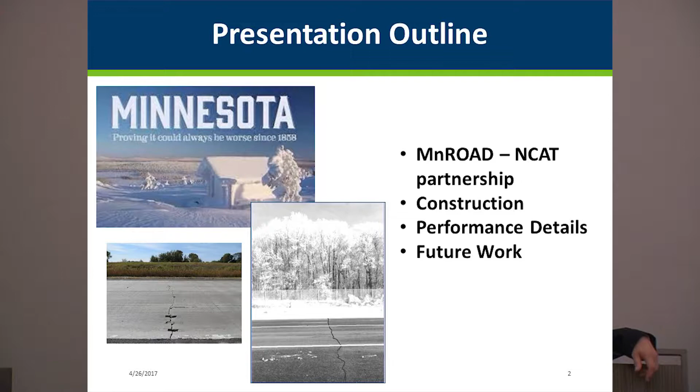I'll talk a little bit about the partnership and how it was developed and why it was developed. I'll talk about the construction that's taken place, and talk about some of the performance of the studies we're doing. I'll touch upon both the pavement preservation side, which is the main focus, but also the HMA performance tests we're doing for cracking. And I'll talk about future work that's coming up as we go forward.

This partnership was one of these things where, if you know Buzz Powell, I think everyone knows Buzz from NCAT. Buzz and I have been friends for a long time through the accelerated pavement testing groups, and we've always said, wouldn't it be nice if we could work closer together? So we finally got our chance when NCAT showed up in June of 2014 and said, let's partner. That was great, no one really expected them to come up. It was kind of a surprise, but we've been able to develop a partnership and work with our two different test facilities.

We have our test facility in Minnesota, and they have their test facility down in Alabama. The idea is that they have a hot, wet, no-freeze climate, and we have a cold freeze climate. If things work in both areas, they would work probably anywhere else in the United States. So we work off the strengths of each other. NCAT's got a great facility, great people, and so do we in Minnesota.

We talk about operational work, doing things more similarly, data sharing, and the analysis side. But it also gives us a greater national appeal, because you can't just build these type of test facilities any day. I think Minnesota built ours for about $25 million in 1990. Now, if you had to build one, it'd be $80-some million. So it's really tough to build a facility like MnROAD, but to utilize it and share it makes a lot of sense for us nationally.

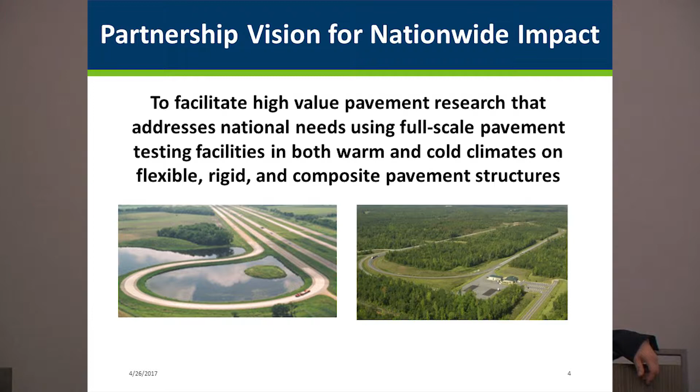So we're trying to facilitate high-value research that our customers are really looking for and need. There's lots of other fancy words in there too, but again, it's about getting products out and getting them utilized and implemented.

I talked about the two different studies that we're looking at, or have started. I'll touch upon the development of the national cracking performance test, but I'll focus on the national pavement preservation study we're doing. This shows the two pictures of the two facilities. How many people here are familiar with NCAT and MnROAD? I get audience participation there, thank you.

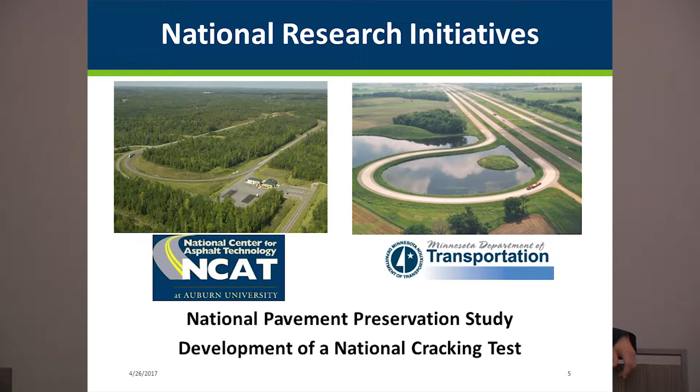For those who don't know, NCAT is a 1.7 mile oval test track. They have 5-axle semi-tractor trailers, with 5 following each other around providing lots of loads in a 2.5-year cycle. So they go on 3-year cycles, but with 2.5 years of loading. MnROAD has both a low volume road, which you can see in the picture, and also a mainline interstate test section. Alongside there's 3 lanes, that's I-94 northwest of Minneapolis, Minnesota. In those areas we're able to do different research for concrete and asphalt. The National Center for Asphalt Technology is, as you'd guess, focused on asphalt technology down in Auburn.

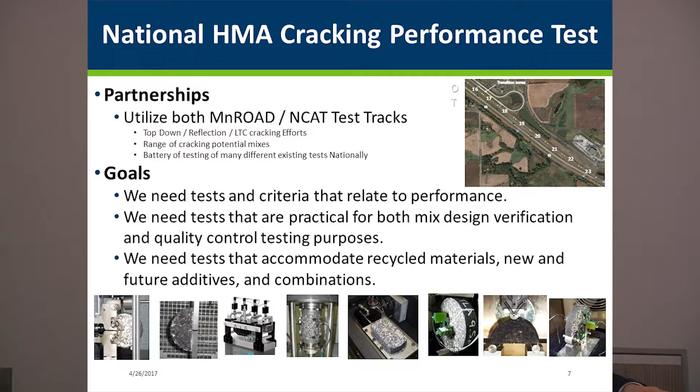We're trying to look at that in the mix verification and mix design form, but we need a test, because if we don't have this test, there's new products always coming out, like recycled materials and different types of polymers being added, and different combinations thereof. How can you test those products or stay ahead of the curve unless you have a performance test to see how that works? What effect does that have on your performance?

What NCAT did a couple years ago, they've been putting traffic on these test sections for almost 2 years now. They have 7 test sections, 200-foot sections, with instrumentation in each one, looking at top-down cracking.

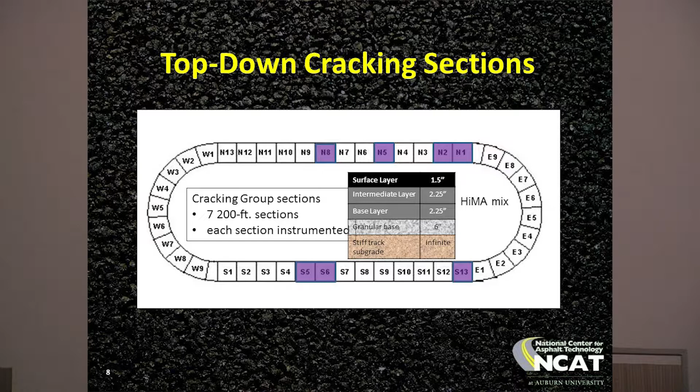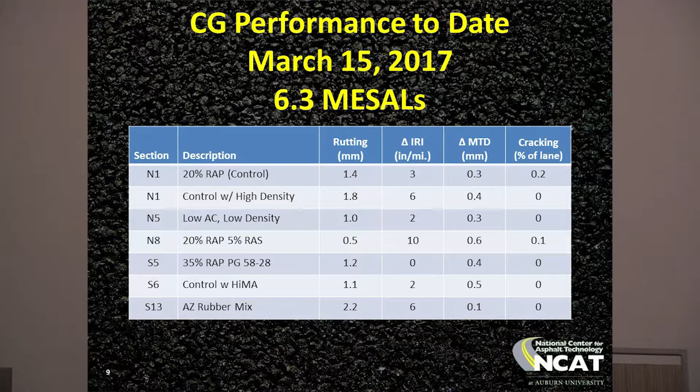Right now those 7 sections, you can kind of see the different mixes they placed. Some of those mixes you'd think would have more top-down cracking than others, but right now the performance is relatively good for all of them. The rutting, the difference in ride, the mean texture depth are all pretty good right now, and there's not much cracking, but they still have probably about 10 months of loading this year until they take traffic off in 2018. So there's time to see what happens there.

What MnDOT, or Minnesota, did—the northern tiered states put together some different designs. The idea was we wanted to design 8 pavements and see how they cracked. If you're going to do a test to see the performance of that cracking, we built test sections like the top one, high crack potential, meaning we used a 64-22 oil, which we've proven doesn't work in Minnesota. You get thermal cracks galore, and if you add some extra RAP to it, it should be a very brittle mix. So the idea is we're trying to build mixes that are going to crack.

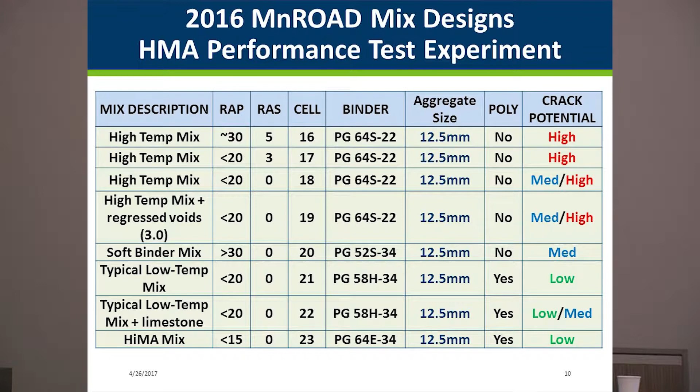We're also trying to build mixes that don't crack. Farther down the list, you can see a HiMA mix with a 64E34 with less RAP in it—that should be a good performer. So the idea is we're building those mixes, we'll do the lab test, and see the performance to see which test actually works out for us.

In Minnesota right now, we did a pooled fund study for a number of years looking at low-temperature cracking, and we came up with the DCT test. It seems to be the best, at least for that version, but there are a number of tests so far, and we've been working to incorporate the DCT test into our specifications, though that takes a lot of work to implement. This test, we're looking at other tests again, taking a second round at it.

Related to pavement preservation, this started in 2015. A number of states are involved, along with the Foundation for Pavement Preservation. The goal is to utilize the ideas of the cold north and the hot south. These are off-site of MnROAD, so we had to find sections of roadway that were consistent, where we could apply a number of different types of treatments in a stretch and see how they perform. NCAT did this on Lee Road 159.

A few years ago, that was the first case study, going to a quarry down in Alabama. Then they built on US 280 the following year. Minnesota built the same types of test sections on a low and high volume stretch. We're pulling together a number of different groups to work on this, to provide consistency to the data collection and then consistency to the data analysis, to see what life-extending benefit curves you can get.

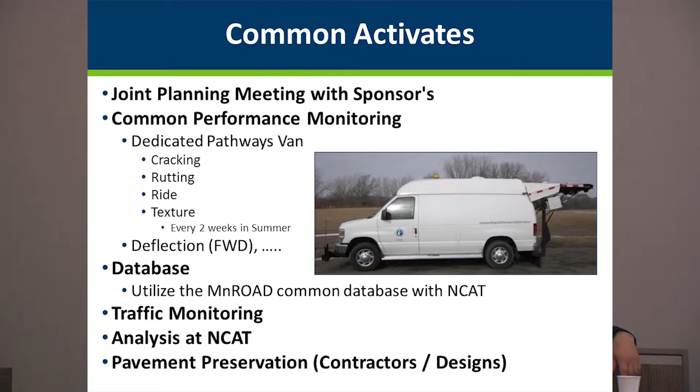We have traffic data, as you'd expect. The analysis is going to be done at NCAT. And again, we worked a lot with the different contractors and designers to develop these mixes and treatments.

Looking at the data frequency we're working with, you see NCAT, the test track, Lee Road 159, US 280 - those are all Alabama-based test sections. The Lee Road and the US 280 are off-site. Then we have the MnROAD site and the US 169 and County State Aid Highway 8.

That's our low volume, so you can see that for roughness, texture, rutting, crack mapping, we can use the pathways vans. NCAT's doing it every week, which I think is overkill, but it might not be. We're doing it every 2 weeks, twice a month.

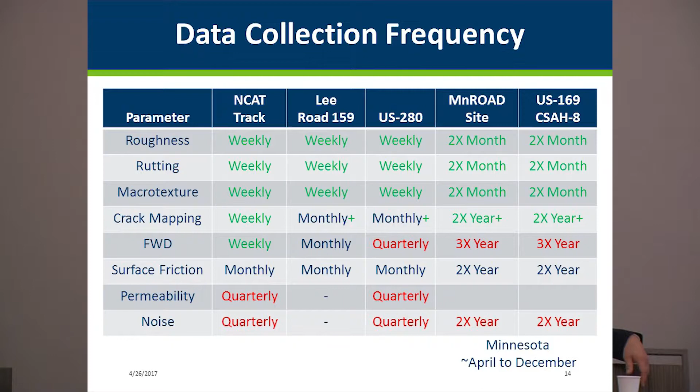In Minnesota, you can't really run the van in the middle of winter, so we're running it approximately from April to December. We're also doing manual distress surveys, along with the falling weight deflectometer, surface friction, and noise. Through this information, we'll be collecting similar information, and all this will be analyzed by NCAT.

Now talking about the sections that were built and some of the observations - can anyone say what that county is? I grew up there, so it's like Mille Lacs County. It makes sense to me, but it doesn't make sense to anyone else when they try to read Mille Lacs County. We worked there - we have US 169 running through that county, along with the County State Aid Highway 8.

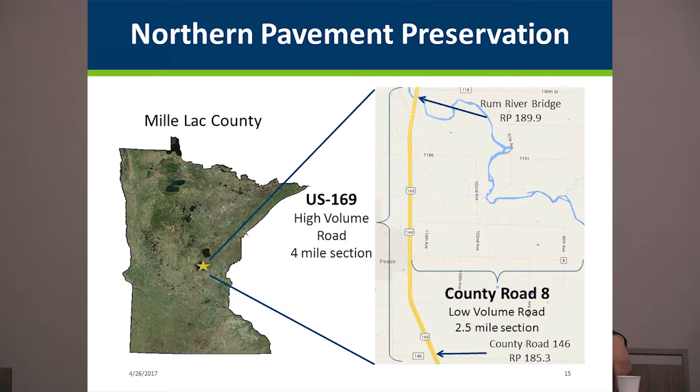When we did these test sections, we worked a lot nationally, and the people who did the studies down in Lee Road and also US 280 - Vance Brothers - came up and did the work in Minnesota. So we had a similar contractor. We had East Alabama Paving help out, Brock White, Craftco, Coarse, right down the list. Lots of different people to thank for coming up and helping do this work and get consistent materials and consistent product out there, so we could do a good analysis on the data we collect.

But again, thank you for all that helped out.

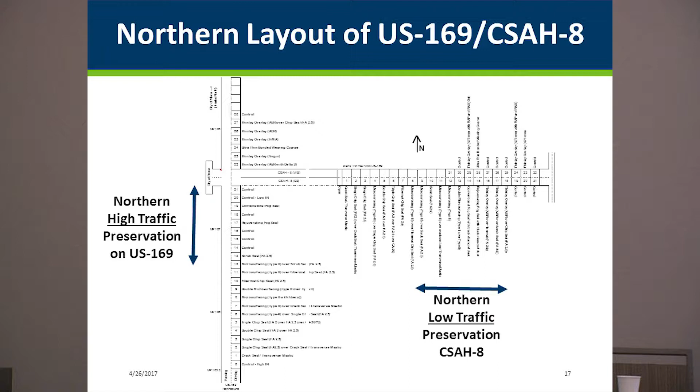So here, this is one of those slides where you can't see it, but it really looks nice. Someone talked earlier about the different types of treatments, and it's interesting - the chip seals, everyone kind of understood. When you get into scrub seals and all these other types of seals, the terminology is really interesting, just making this chart, because how do you put that down on paper?

But again, it shows the number of test sections - we have about 25 on US 169 and about 25 on CSAH 8.

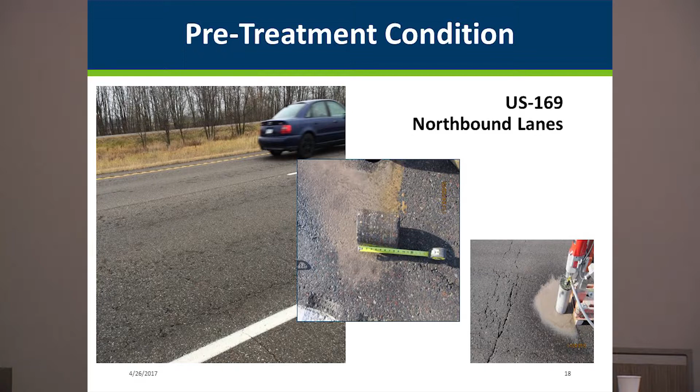And this is the way the sections looked before we started. US 169 was actually a pavement that was maybe a little too far gone for pavement preservation in some ways, but it was a good candidate for the reality of what we really are doing for the state and for the cities and counties.

This is a pavement, I forget how much traffic it has on it - it's not a high amount, it's a couple thousand, maybe 10,000 ESALs or 10,000 ADT one way. But again, it's kind of a squirrely surface. There's some thermal cracks, there's some cracking. It kind of looks like a dry mix, but we did take cores, and that is solid underneath.

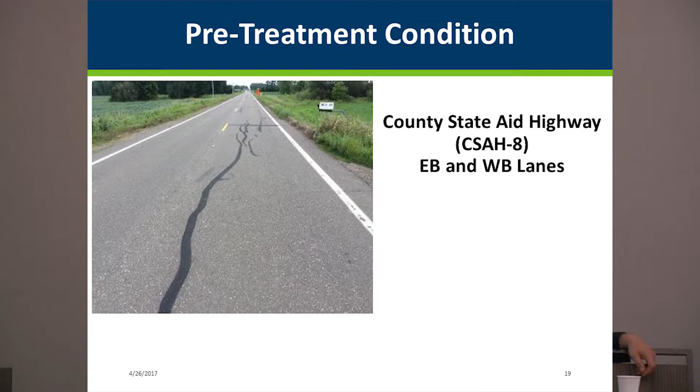Whereas CSAH 8 was more of the classic - you go 50 feet and there's a thermal crack, you go 50 feet, there's a thermal crack. So you had those thermal cracks controlling there, whereas you didn't have as much of that squirrely cracking happening in the wheel path, but there's some cracking there. We utilized both the east and west bounds for CSAH 8.

So this is some pictures. We built these last year, and here's some different things that you can kind of see that's happening.

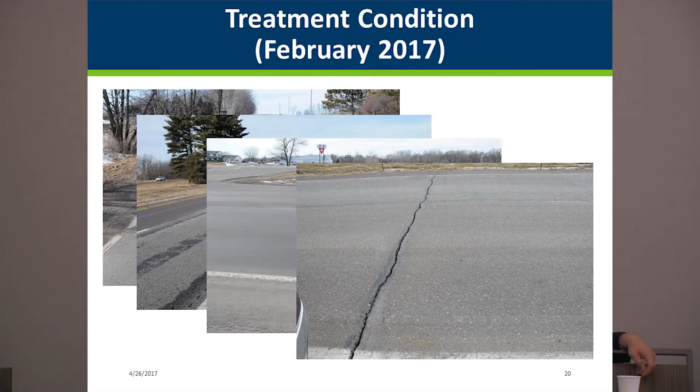You can see here the treatment. This is a scrub seal that started here and went up to here. We're building short test sections, which kind of shows how it's hard to start and stop these types of treatments.

They needed some time to get going before the treatment actually took, and it debonded there a little bit. We'll be taking that part out of our analysis. Again, it's tough building these tenth-of-a-mile test sections one after another, so we did see some debonding — some of it construction related, but not the fault of the contractor. It's just that there are lots of test sections.

Good old snow plows did some damage. This is something we talked a lot about. You can kind of see the damage there, not as much on the fog line, the white line. They kept the treatment to save the white line, but you can see the plow scrapes off the center line.

We use underbody plows in Minnesota at times. Typically, they're told to stay off them the first couple years, but when you get ice on the road, they do need to for safety, so they work on that quite a bit. Again, only the driving lane was treated. You can also see there's a lot of salt out there and different things, but the treatment looks pretty good, and we've been keeping track of the snow plows going over it.

Here's another interesting thing: on all the treatments on 169, the Thinlays we put out — some of the Thinlays have thermal cracks that have come up through about half of the original thermal cracks. The rest of the treatments have already thermal cracked all the way through.

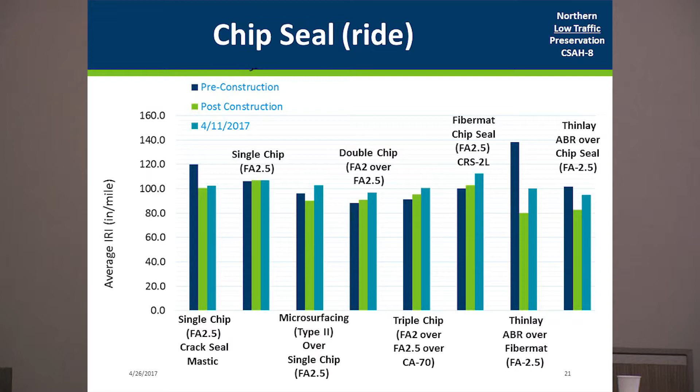When you look at some of the ride data — here's pre-construction, post-construction, and then this April we collected some more data. You can see some of the differences related to chip seals. We did chip seals with crack sealing and mastic, microsurfacing over chip seals, triple chip seals, double chip seals, and Fibermat with chip seals — a number of different combinations.

You can kind of see some of the chip seals performing as you'd expect, and this is just on CSAH-8. These are the sections that didn't have as squirrely a surface but more just thermal cracks, and the thermal cracks are pretty much still there — you're still getting the rough ride through those.

We did see a little bit of a fix there with the Thinlay over the fiber mat — that section is actually looking a little better after it's been done. So again, not a big difference in ride overall, but a noticeable improvement in a couple of sections.

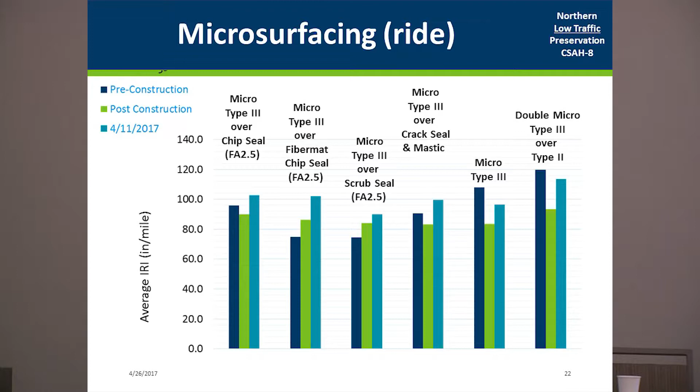Microsurfacing — this shows the different types of microsurfacing. I think it's a little easier to see here, but there are a lot of different combinations of treatments together. Again, you're seeing that we haven't had a really great influence on ride when it comes to microsurfacing either.

It stayed pretty much stable with that. But that's not to say much, because in Minnesota we have seasonal variations in ride and things like that. So this first ride measurement in April, we could still have had some frost action going on. It's really maybe a little too early to make judgments on these treatments right now.

The overlays, the Thinlays — different types of actions that have been going on. Again, on CSAH-8, I'm just showing you those. We had seen some improvement in ride that helped with the thermal cracking.

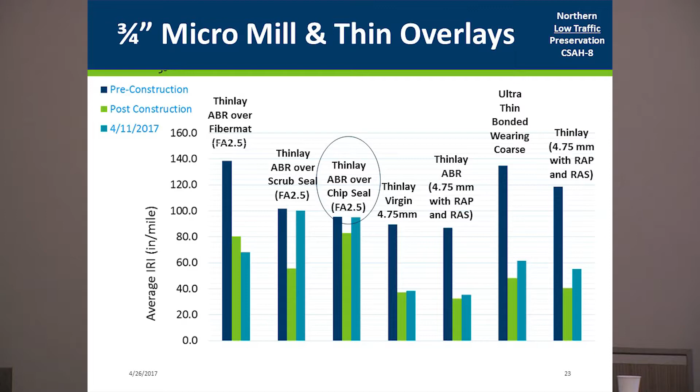But those thermal crackings are coming back. So you're seeing probably the better improvement, but again, this is more costly doing the Thinlays — it's more of an effort to do them, but you're seeing a little more benefit. We need to collect more data before we can say anything significant about that.

It's kind of interesting too — you can see some of the Thinlays with readings where you didn't get as much improvement. I think that might have been related to the milling, to how the milling took place.

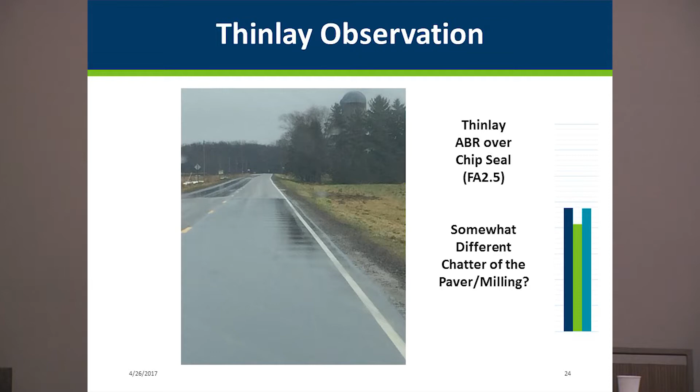You can see that variation in the data there — there's a bit of a ruffle to it where that roughness is coming through. That Thinlay wasn't able to go over that and produce a better performing roadway. So that's something we need to look into too.

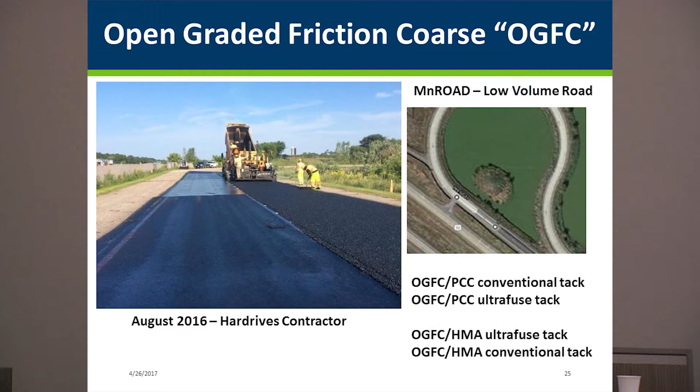One of the things we were asked to put on our test sections up in Mille Lacs County was an open graded friction course. This was something that in Minnesota we had a bad experience with, so it's one of those things where we said never doing that again. So this is where MnROAD came in.

We only have to worry about Doug the truck driver complaining or driving off the road. So we put down basically 2 stretches of 50 feet each. We did an open graded friction course with conventional tack on concrete, an open graded friction course with ultrafuse tack on concrete, and then the same type of tack on the asphalt section, because we had a section there of both concrete and asphalt. You can see in the right picture.

We did this open graded friction course, and I guess it's good to say that after the first winter, it's looking just like it did when it was put down last year. So there's some benefits to that. We have not noticed it icing up or anything like that.

What's an ultrafuse? It's a trackless tack, if that makes any sense. I never quite understood that terminology - trackless tack. Tackless tack would be really good, but it's a trackless tack.

So it's something we haven't used. It's very stiff, and a lot of the engineers had some issues thinking that it's not going to perform very well. But right now it seems to be working just fine.

Here's some of the information from the southern sections. Again, they've been collecting data for a lot longer. You see some of the different things - they have control sections where they had high rutting sections, low rutting sections, high cracking, low cracking.

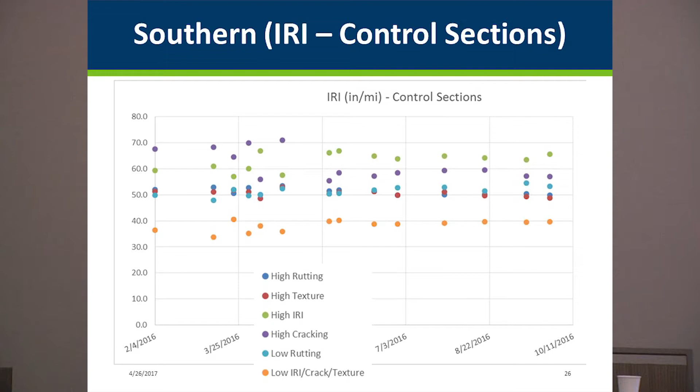And it's going to take time. As you can see with some of these performance curves, you don't see it dropping off like we all draw the classic line where it drops off. But you don't see that quite yet, and it's going to take a little extra time to see this.

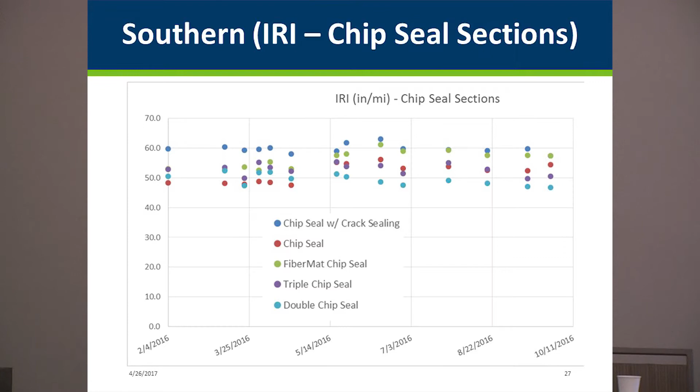So I just wanted to show that for Southern. They're collecting their data on chip seals - again, Minnesota's got 3 points, NCAT's collected quite a few different points. You can see the combinations of the treatments are the same down at NCAT as in Minnesota.

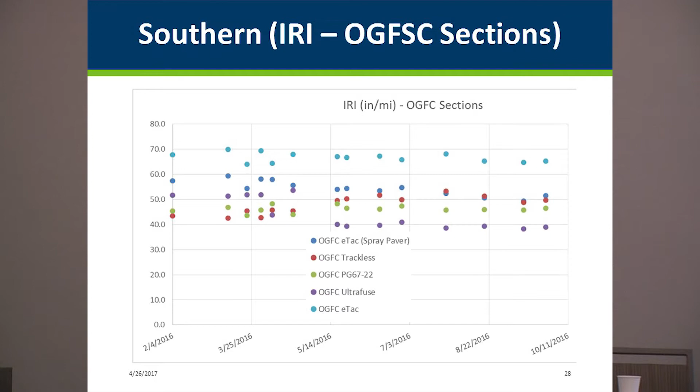And then when you start looking at the open graded friction courses, also on the different work that they did on their test sections down there - again, they're in a different environment for those test sections. So the idea is, I think what you're seeing is we've collected 3 points, they've collected a number of different points, and it's going to take a little extra time.

I guess when you start talking about the future of our efforts together on this, I think MnROAD and NCAT are going to be working together for a long time on a number of different studies. We're always looking for good ideas if people have those ideas.

When you start talking about NCAT, again, they have a national pooled fund study that this is all part of. They're hosting many projects, of which the HMA cracking and the pavement preservation is part of. In 2018, they're going to be reconstructing their test sections on their test road.

We have a spring sponsor meeting coming up next week - again, that's kind of a combined effort between our 2 facilities, May 16th through the 17th. I know Chris is going to be there. Anyone else going to make it down there? So we got 2 - Pete's going to be down there too, so that'd be good to see you both down there.

With MnROAD, what we're doing is, I think our future is a National Road Research Alliance - this is our pooled fund. We're going to be doing a number of things through it. We'll be doing both concrete and asphalt, and we've started doing that already.

We built our test sections for the cracking through NCAT in 2016, but in 2017 we have construction going on for both concrete, asphalt, pavement preservation, and also a lot of work in geotechnical and different types of base materials. So we have a lot of different projects for our long-term research that we're funding through that NRRA pooled fund.